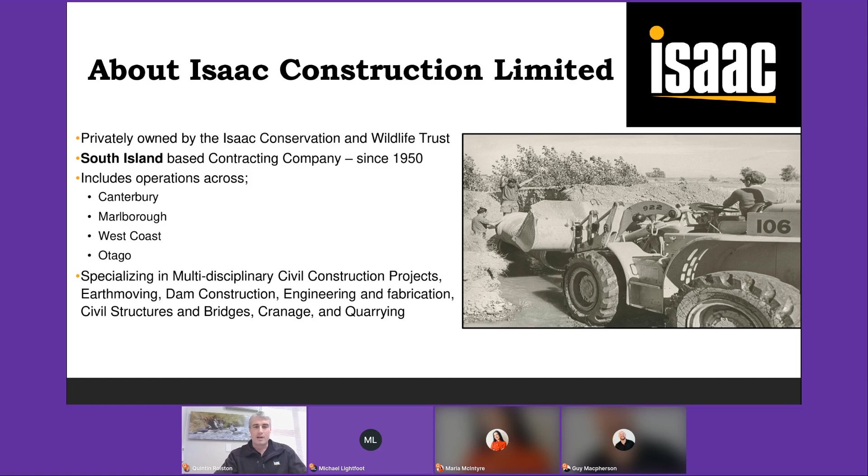We've got three key brands. Simcox is our Marlborough brand, Isaac Construction is our Canterbury and Southern brand, and Liddell Contracting is our West Coast team. And you'll see this pop up a little bit as the Isaac Conservation and Wildlife Trust is our ultimate owner, and I'll talk about that at the end of my presentation a bit more.

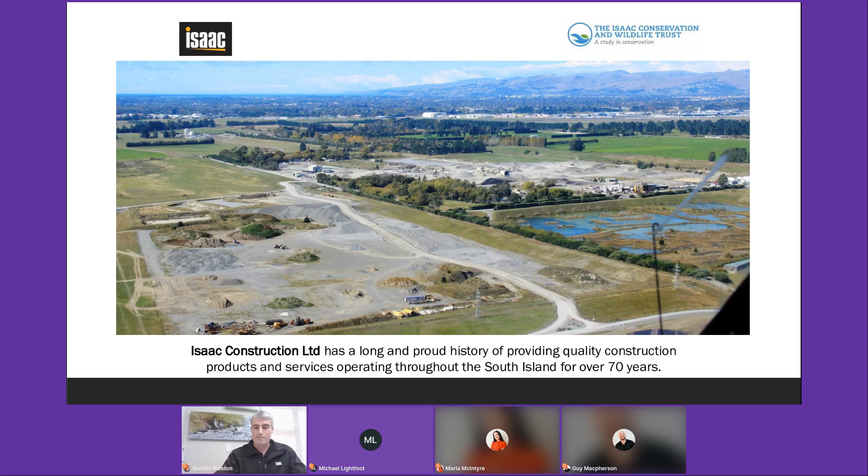So we're based in Christchurch. This is a view across our property where our key quarry is at the moment, looking back across Christchurch and over to the Port Hills. So we're situated between the Waimakariri River and the airport.

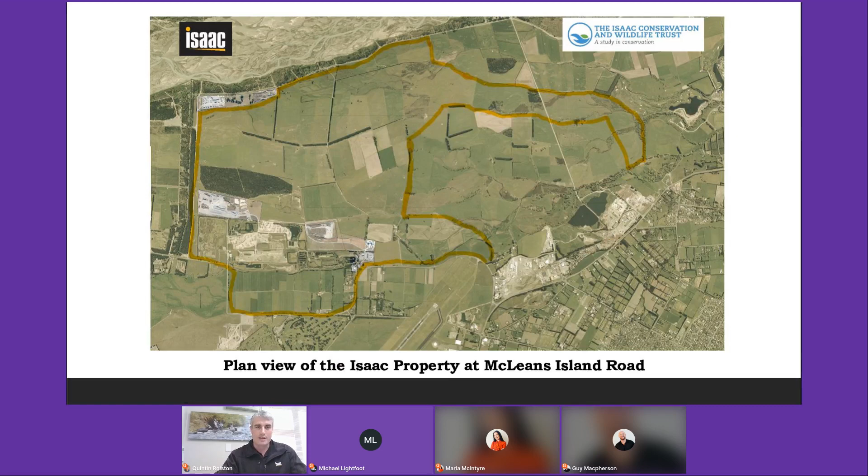Bit of a snapshot of our land there. We've situated 1,100 hectares, like I say, between the Waimakariri River and the Christchurch airport.

So here's just a bit of a summary of some of our core areas of business: construction, engineering, paving and sealing, so surfacing works for roading. We've got traffic management, laboratories, transport divisions, departments, and we operate across Marlborough and the West Coast, as I mentioned, with Simcox and Liddell Contracting, and Isaac Southern and Isaac Southern Quarries is our Dunedin branches, and that's where our project features that I'll talk about soon.

Pictures are always helpful to actually visualise what it is that we do and why we might be interested in noise and vibration monitoring. So this is pretty typical of the type of things that we are out there constructing and building: streetscaping works, asphalt paving, paver laying, and general construction, and particularly central city type construction works.

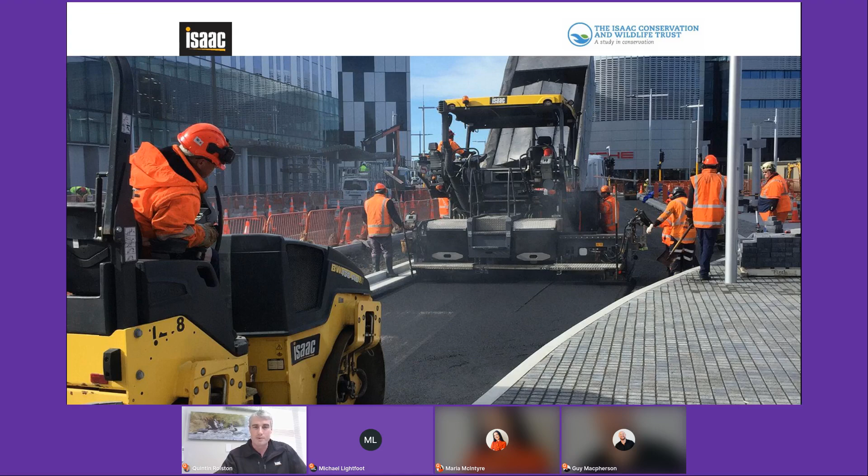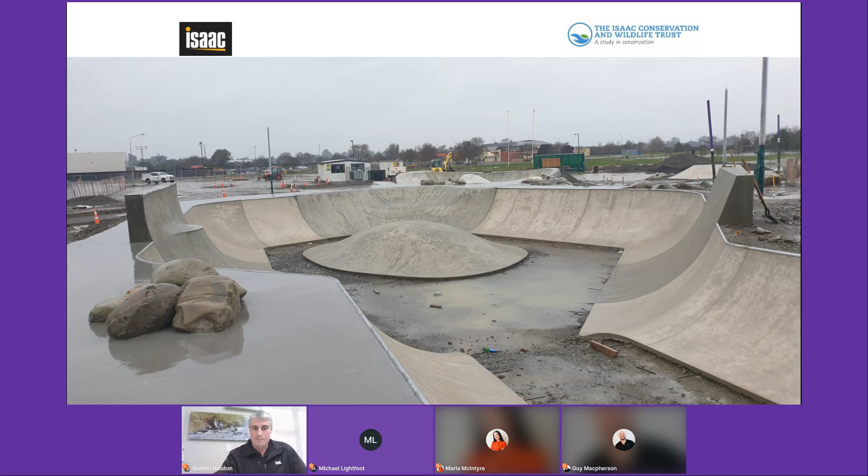Just run through a few examples. I guess Kilmore Street in Christchurch there, outside the town hall. We're into a variety of things, currently building a skate park in Selwyn.

Quarrying operations, so crushing and turning big stones into small stones, which is pretty interesting, but certainly has a noise, vibration, and dust effect on surrounding community.

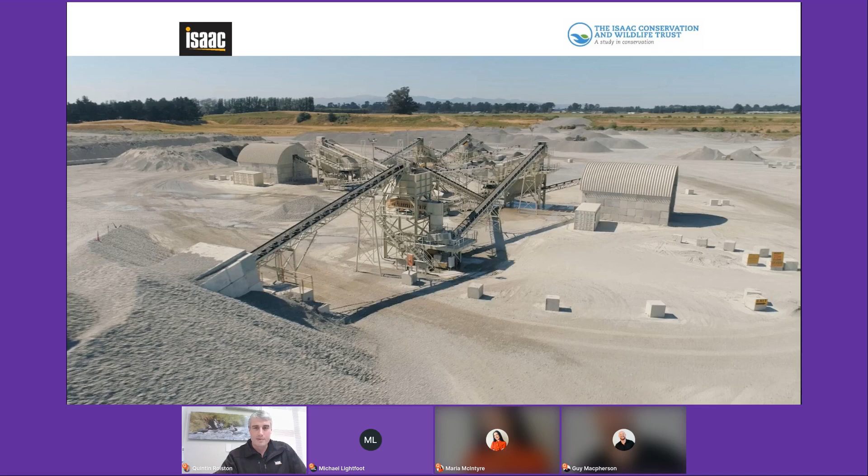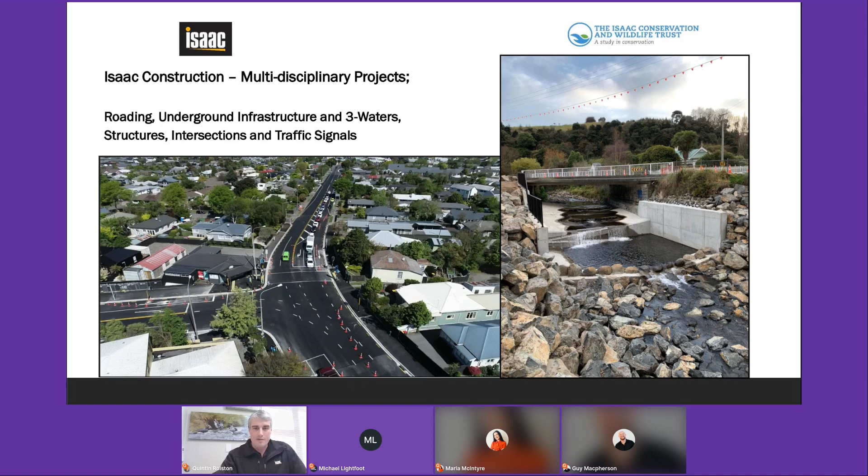And just a few more project examples of what we've been building. Christchurch Northern Corridor access into Christchurch on the left there, and a river upgrade project in Dunedin on the right. A bridge construction project on the west coast, which is just coming to completion now.

So I'll move on to our particular project that we're looking at today, which is the Retail Quarter project, George Street upgrade in Dunedin.

The Filluel and Great King Street areas are 3 water upgrades with more traditional streetscape topography replaced on top, so curb and channel, asphalt footpaths and generally asphalt pavements. The central spine through George Street and on some of the side streets there is more of an urban city mall environment. I'll show some photos of what we've currently got and what we're looking to achieve soon.

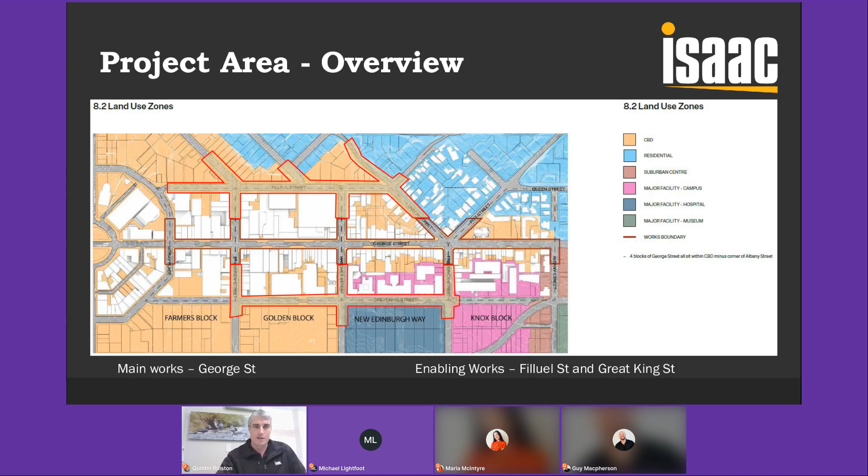We've got some stormwater upgrade works, some pretty substantial stormwater upgrade works of some pretty big diameter pipes, upwards of 1650 in diameter, which just requires large excavations, large deep excavations, potentially sheet piling and shoring and other interventions. Full 3 waters, full potable water upgrade.

And this is right across the cross section of the street from the shop frontages right out through the centre of the road across to the other side. So it's pretty invasive sort of work that we're undertaking.

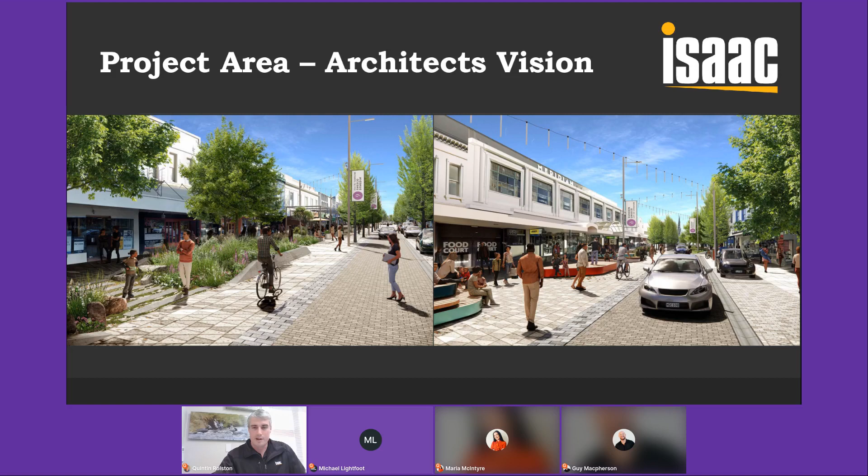So just a bit of a summary of it there. All 3 waters, deep excavations and trenches. We've been using trench shields to date, but there's a potential we'll need to use sheet piling in the future.

The roading works are pretty substantial, full reconstructions. So a lot of excavations and dig out and full replacement. Therefore a lot of compaction and a lot of vibration and noise. A lot of streetscape works, paving, new lights and street furniture and decorative footpaths, paved footpaths.

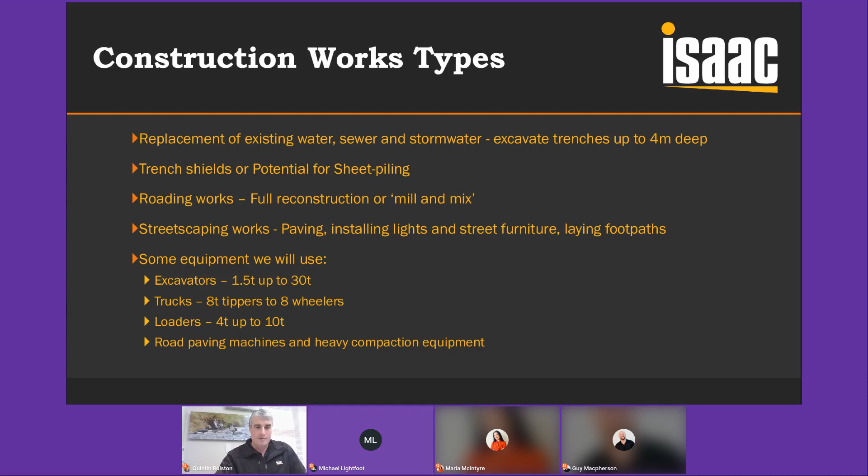And a bit of a summary of the cross-section of machinery that we'll be using. So large excavators, hopefully not cranes, but there's potential for cranes, certainly trucking, loaders, heavy compaction equipment.

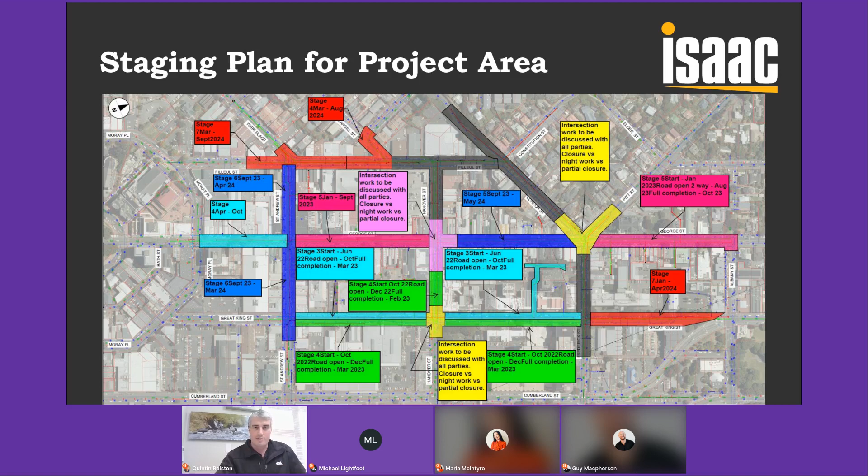So there's quite a few key challenges with undertaking this work. A few of the key ones I'll run through here is managing interface with stakeholders and shops. This work does go through the key retail offering of Dunedin. There's the only three malls in Dunedin that are within our project area.

There's a lot of inner city retail and food and beverage offerings, small businesses and small retail shops, as well as big brand shops. So our project is hugely affecting these people, and it's a key thing that we need to try and manage whilst doing some pretty invasive work.

So managing the traffic flows, managing access, business disruption, and at the same time trying to complete the works as efficiently as possible and keep on program as much as possible, which is a real challenge.

Of course, we have to manage safety, which is paramount, of our people and the general public. We want to complete the works to a high standard. And then the two key ones is managing expectations with regard to noise and managing vibrations.

Additional to the retail offering through this area, there's also flats and apartments up on the second and third stories of many of these inner city retail shops. So that's just an added challenge to it.

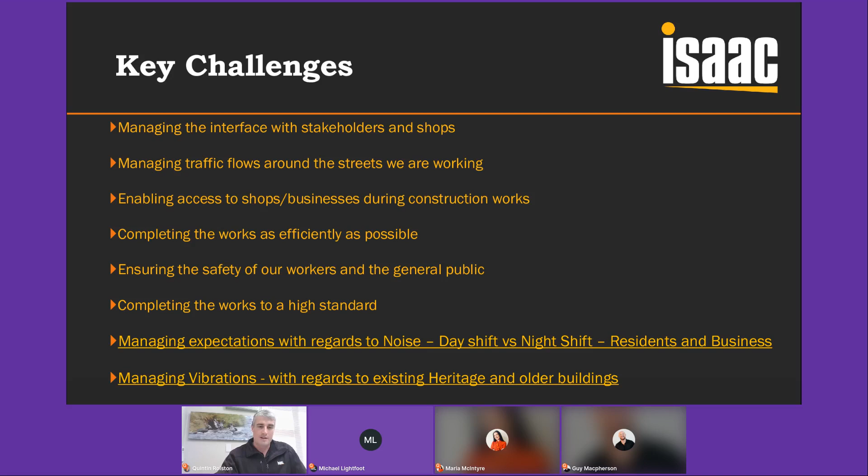We'll talk about these two mostly today.

So, managing expectations with regard to noise. Like I say, we've got businesses trying to operate during the day and residents trying to sleep at night. So the noise limit that we have on any of these sites is 85 decibels, and that's what we're tracking against.

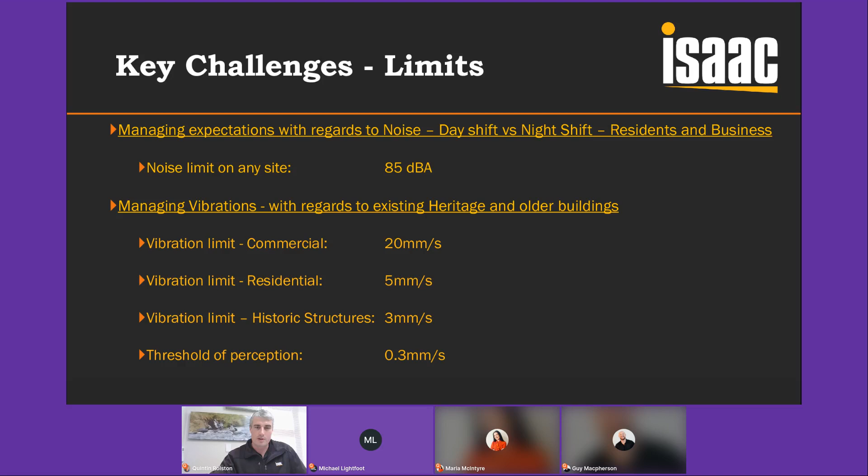And then in terms of managing vibrations, there's a number of standards and parameters that we can look at. These are the ones that we've looked at as part of our project. The key ones we'll focus on are these two: 85 decibels for noise and 3 millimeters per second peak particle velocity for measuring our vibrations.

And that's a guideline that's set down for ensuring that we don't damage historic structures, which we do have a number of heritage items within this project, including a number of heritage buildings or heritage-featured buildings. So that's the limit that we've set for ourselves, and that's what we're tracking against at this stage.

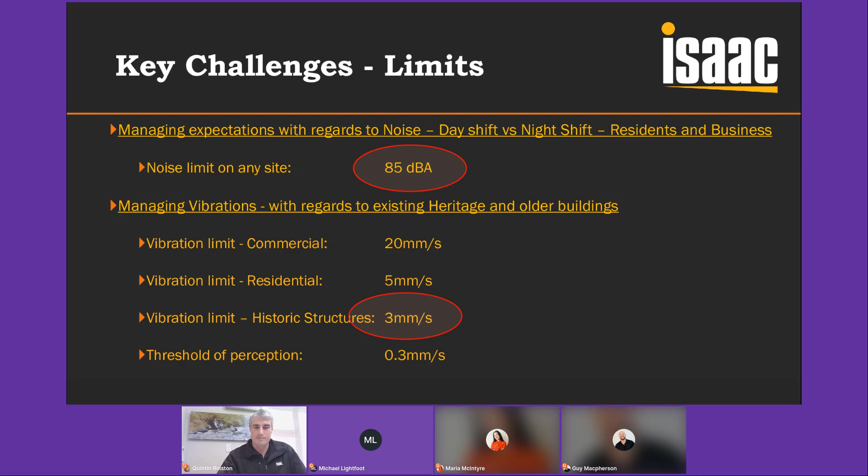This is a panoramic of one of the legs of the work, one of the sites, which is Hanover Street. We've been working in this street since about April this year, and here's a bit of a snapshot. It's a little bit hard to tell, but the excavations and the trench shields that we have in there go down to about 4.4 meters deep, I think it was, through here. So some pretty deep and pretty invasive excavations, and you can see we've got some big machinery, a 14-ton machine, and trucks coming in and out of that site, as well as other smaller machines, smaller loaders, etc.

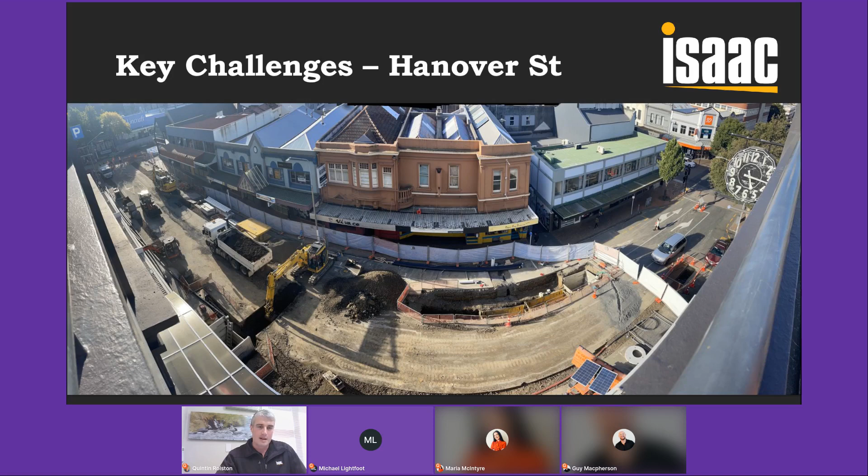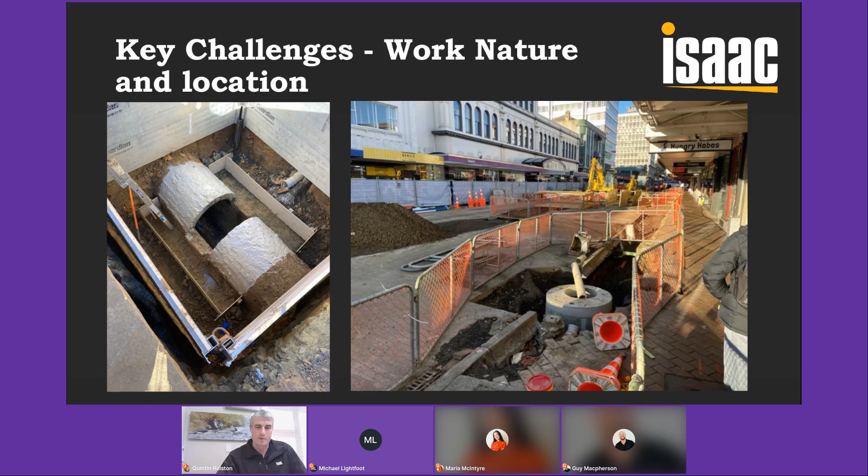And there's a snapshot of George Street, sort of showing how close our work site is to the shop fronts. In fact, we'll be going right up to the shop fronts and the boundary line with our new paving when we get to that stage. But it's pretty invasive.

So that's a bit of a snapshot, but we can also get specific details for individual monitors.

So again, this is a snapshot of the current noise level from when it was taken at 283 Great King Street. It was currently running at 50 decibels, but the graph on the right there gives us the snapshot of the day. We can see from midnight it's hovering between 47 and 50 decibels. Then as we started work shortly after 6 a.m., 6:30 a.m., the noise level rose quite rapidly up to about 80, then leveled out a little bit, floating around 60 to 70 decibels. And that's reasonably typical for what we're seeing on many of our sites at our monitoring locations.

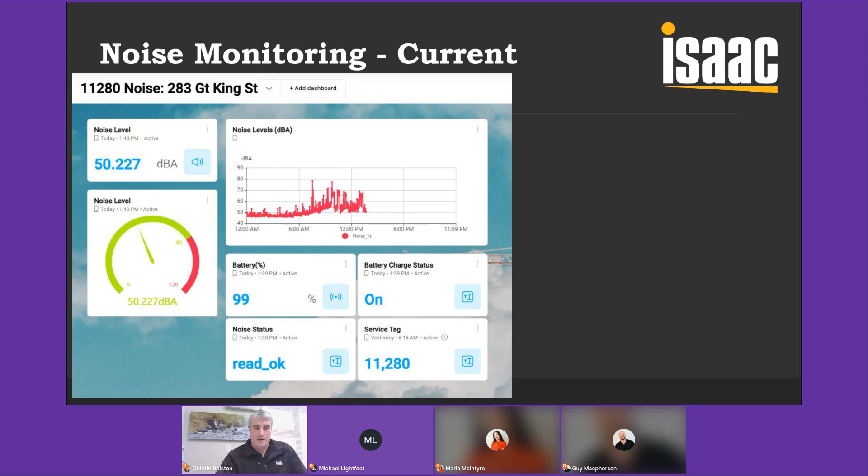So that's another snapshot, and further to that, we can run reports for the last week, the last month, or any time period that we choose just by using the filters in the Adroit software. So this is just a snapshot from that same site, 283 Great King Street, looking at the noise levels over the past week. That one shows nothing over 70 decibels for that particular time frame, which is generally fine.

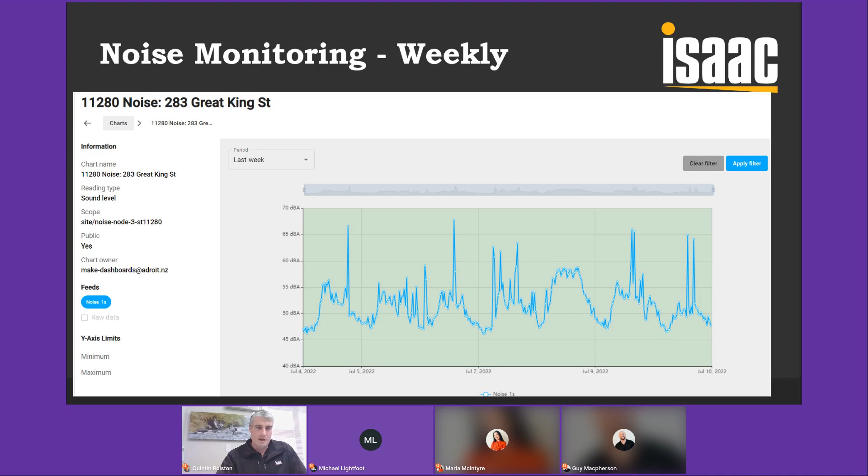I've added in another one here, another one of our noise monitors at Farmers Block, which is on George Street itself. Just showing there that these noise readings are getting quite close to our limit, and in fact some of them have eclipsed it on a couple of occasions. So I guess this is the data that we can use to discuss with our client and stakeholders, and look at our work methodologies and noise screening opportunities. Because at the end of the day, we've got to do our work, but we've also got to manage noise and manage the expectations of the stakeholders and residents.

This is the kind of report that we can get out of the software.

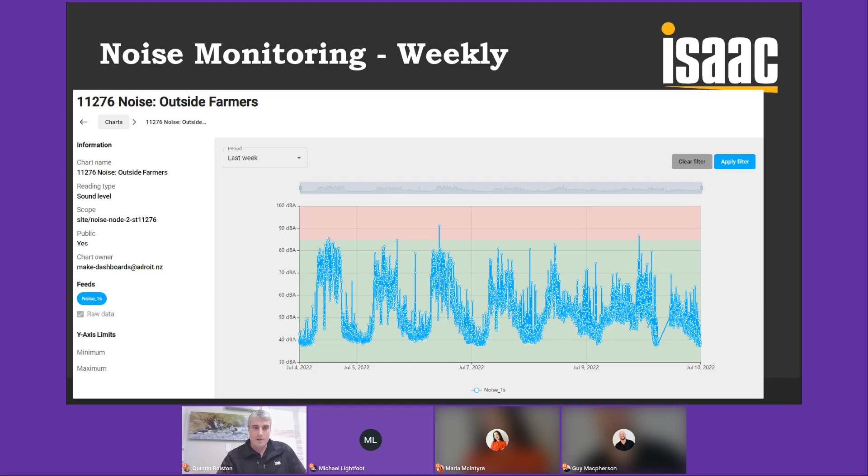Focusing on just one of them, 26 Hanover Street. If you remember, we set ourselves a limit of 3 millimeters per second for peak particle velocity in all directions, X, Y, and Z, which I've circled there. The top left graph, a bit small and hard to see, shows the actual peak particle velocity reading. It's well below 3 millimeters per second on this particular day, hovering more like 0.1, which is pretty low. What we generally look at is the percentage reading towards that peak particle velocity. I'll go into that in the next one.

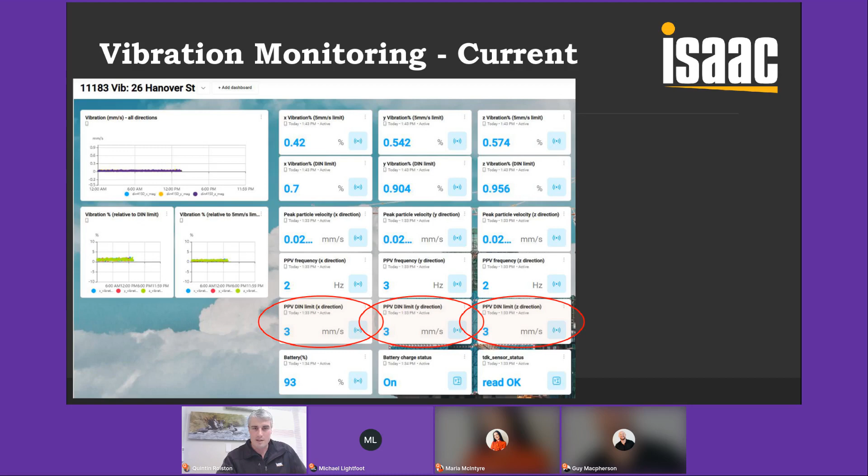Going back to that photo from before, this monitoring site is at the site where we were doing deep excavations. So it gives a little context on the type of work we were doing and what these results refer to.

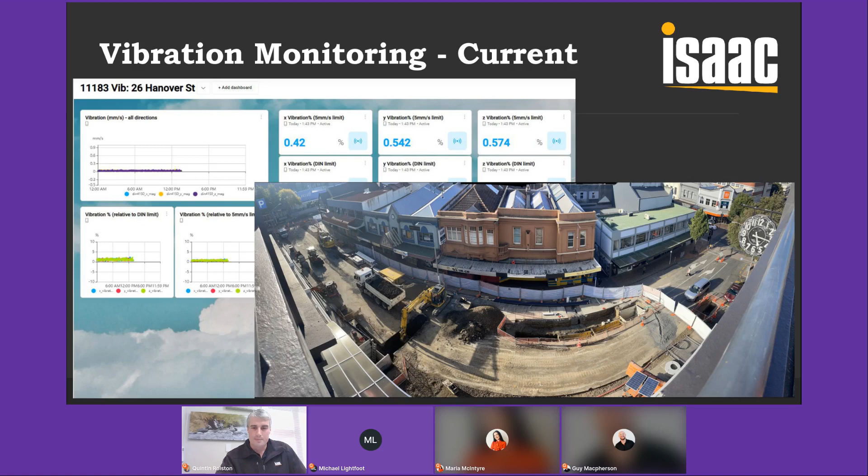I went back in time and pulled the information from when we started down there on Hanover Street, around the 20th or 21st of April, when we got the monitors set up. That first portion of the graph, for 4 or 5 days, was zero construction activity on site, and you can see it still reads some movement. Then around the 23rd or 24th of April, you can see the lines start to move a little bit, which coincides with when we started work on that site.

I mentioned we're measuring percentage of peak particle velocity, so we're at less than 5% of our 5 millimeters per second limit, well below our limits, which is good. That graph is a little hard to see, so I've blown it up a bit there, same graph as below but easier to see. There is a bit of a difference when we started work on site.

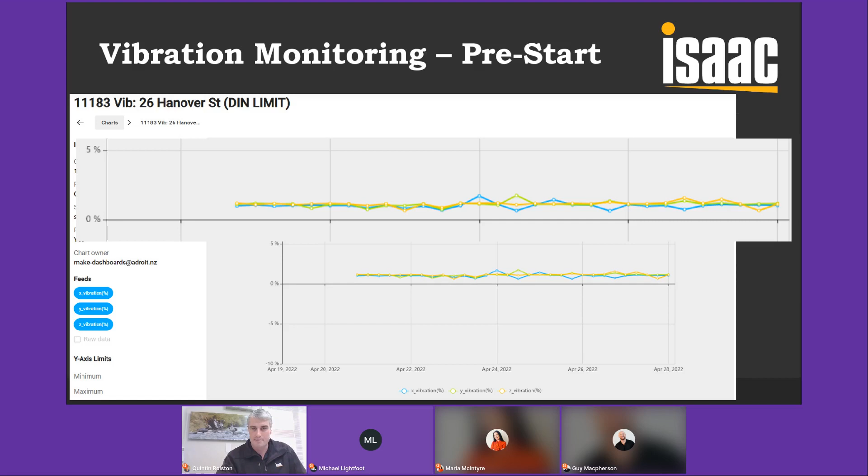Same as the noise monitoring, we can pluck out a time period. This is looking at a month from when we started on Hanover Street through to the 20th of May. You can see right at the start very small movements, and then some movement over time across that month, but well below our limits for vibration. This is good data to have, particularly if we get complaints from business or building owners about cracks or damage occurring to their building, so it's good to relay and address their fears that might be due to our works.

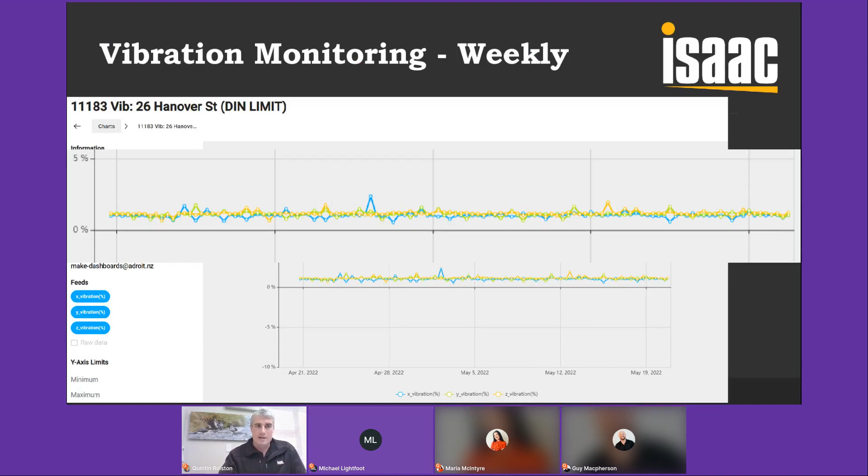That's the end of the vibration and noise overview for what we're doing here on site. To wrap up my section, I'll quickly go through and refer back to our Isaac Conservation Wildlife Trust, who we are and what we're about.

Founded in 1950 by Sir Neil and Lady Diana Isaac, who were contractors but also conservationists at heart, they set up the Isaac Conservation Wildlife Trust, which operates in perpetuity and is the reason the construction business exists. We exist to ensure these people can keep doing their good work. They are a self-funding charitable trust established for conservation purposes, based out of Canterbury but with operations across all 4 regions we're working in.

They have 3 key mandates: first, conservation of native fauna and flora; second, conservation of heritage buildings; and third, conservation education. We've got the Isaac Conservation Park, where we breed endangered birds, 5 species at the moment, and in partnership with DOC we release them into the wild. The team has done some amazing work over the last 25 to 30 years in that space.

We also rehabilitate our quarries into wetlands, reserve areas, and breeding facilities for that work to occur. We've created the Isaac Heritage Park, which again is on site out at McLean's Island Road, Canterbury. And the education side is postgraduate scholarships at Lincoln, Otago, and Canterbury universities.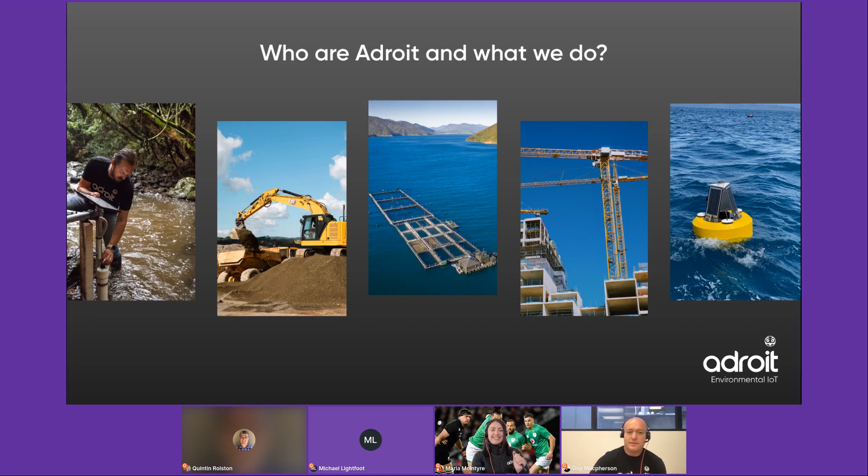Awesome, thanks Maria. Okay, so we work with a variety of different types of sites. So why do we monitor on work sites?

We work with industrial sites, greenfield sites, and across civil sites, and they all have different requirements. With greenfield type sites, you're looking at monitoring on the borders, around your sensitive areas on that border, as opposed to a working site like a hospital, where you're monitoring within the actual site.

The three areas that we monitor around this are compliance, complaint mitigation, and health and safety. Compliance is understanding the resource consents and thresholds for that particular site, and it gives real-time data through to the site managers so they can manage that site efficiently.

The second one is complaint mitigation. This is about being able to bring up your historic data so you can actually see when there's a complaint, if the site is in breach. Potentially it may not be, so you're able to show the data and say, hey, it was maybe noisy, but we are well below the 85 dB threshold.

The third one is health and safety. This is where we monitor foundries, we work with crushing plants. It's about understanding what's happening within the hazards on a site, understanding your PPE, when you should be wearing it on site, and just giving you greater visibility.

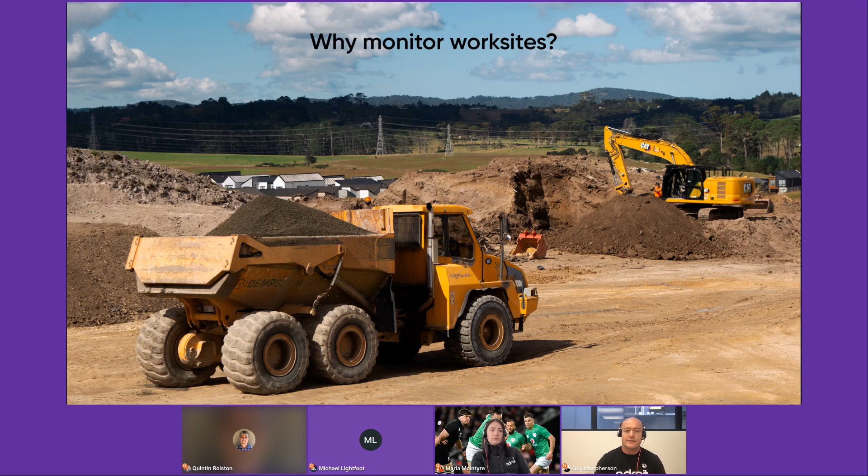I'll set you back to Guy. Awesome, okay. So what do these look like in real world situations? I'm going to go through 4 different setups on 4 different sites. The one on the left is one we did with Firth.

This is monitoring noise and dust with solar. As you can see here, it's on a fabricated steel pole, so this is made to be fixed, not moved around the plant.

The second one is something we did with Dempsey Wood for a civil site. Civil sites are often really big sites with the work slowly working down them. As you'll see on this monitoring station, which is also doing noise and dust on solar, it's got a base with sandbags in it. This means the monitoring station can actually be picked up and moved down site.

The third one is something we did with Precinct Properties. This is using existing structures adjacent to the site, and this is just monitoring noise. So this is with your inner city type environments, when you can install onto structures or existing fixtures.

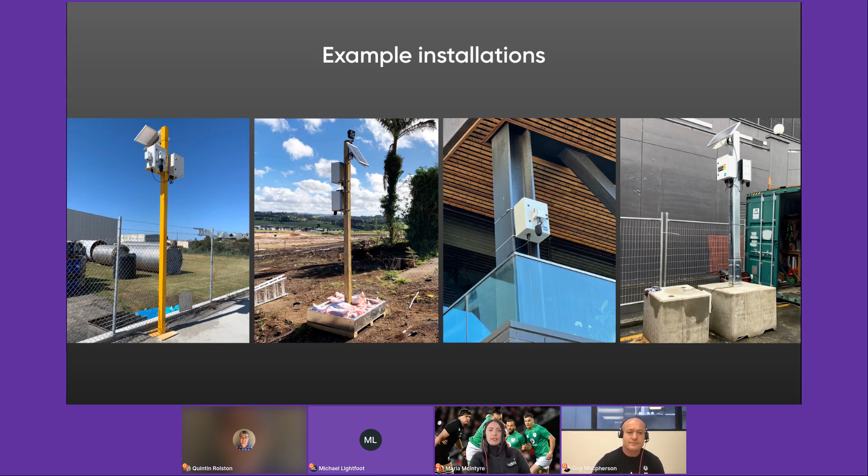Sweet. So now we have them installed, how are you going to access the data?

The platform can be accessed in two ways: you can download it on your iOS or Android app, and you can also view it on your browser. This is what you're looking at here, on your browser. We wanted to get the most engagement possible from our platform. On the left you'll see one of our old type platforms, where you're just looking at boxes with the data.

And on the right, you see we've overlaid a site plan. So a site manager can look at that and say, okay, here's all the sensors, and they can quickly figure out what's happening. They're all in green, which means they're not in breach, so they're within the set threshold.

Our platform, again, we sourced the best of breed platform — we didn't build it ourselves. It comes with all the functionalities you need: full visualizations, thresholds, alerts. There's a full set of APIs, so you can plug the data straight into your SCADA or your project delivery apps that a lot of our clients use, and then it can all be downloaded onto a CSV file or your Excel sheet.

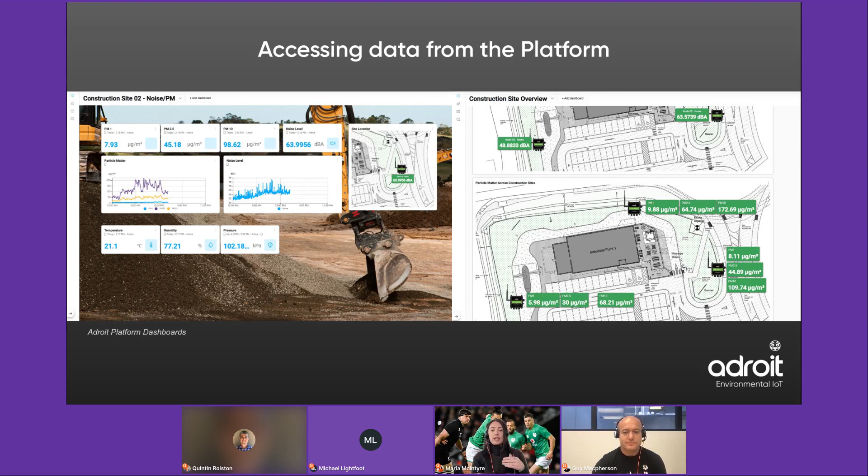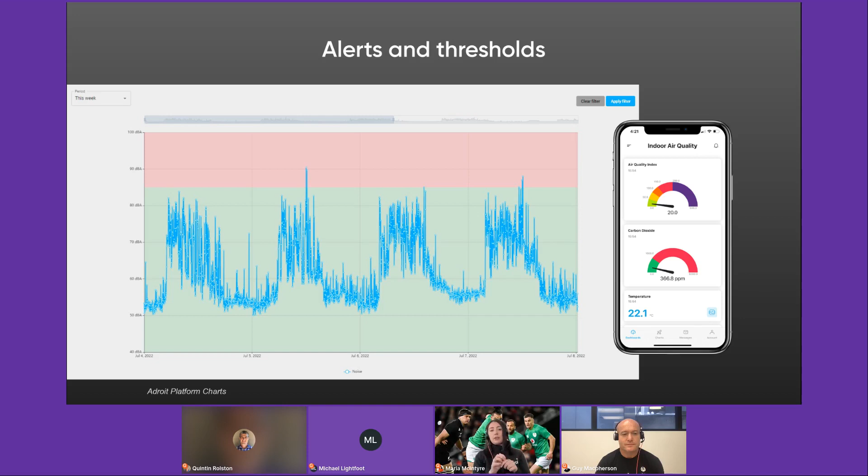If we go to the next slide, it will show us the charts. This is where you're going to get your deeper insight. We've set a threshold here of 85 dB, which means they've literally only gone above that maybe twice or three times. Super compliant site. It's a great tool when you want to communicate that with your stakeholders, your staff, your board, or anyone coming on site. You can say, look, we're doing everything we can. We're not in breach, or we are, and we're doing everything we can to deal with it. So yeah, it's an awesome visualization tool.

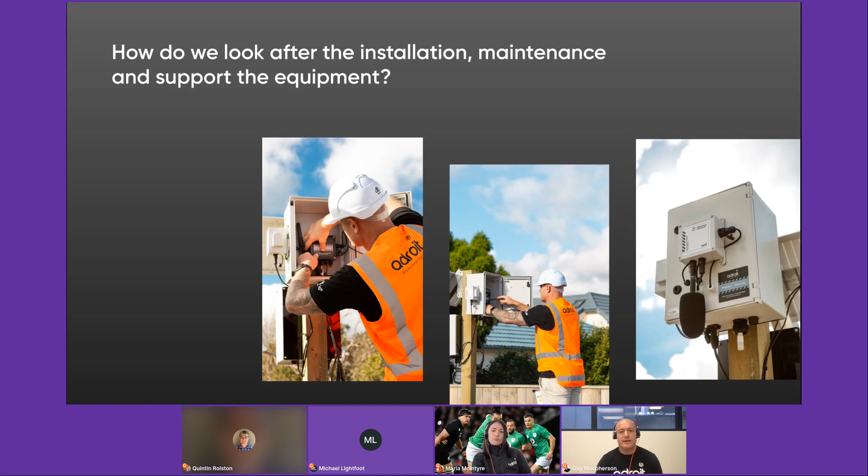Fantastic. Okay, so what about the installation, the maintenance, and support of the equipment? We have a nationwide team that manages all of this for you. One of our project managers will talk through with you, understand what the consents are, the actual type of site, and look at where's going to be the best place to position a monitoring station. We then look at what's the best way to install, whether it's on a post, on a wall, or whether we should organize the deadman's block. We then look after the maintenance. To be honest, all of these types of solutions are very low touch, so there isn't a lot of maintenance required. And with any support, we've got phone support as well as our team that can come on site to do any break fixes.

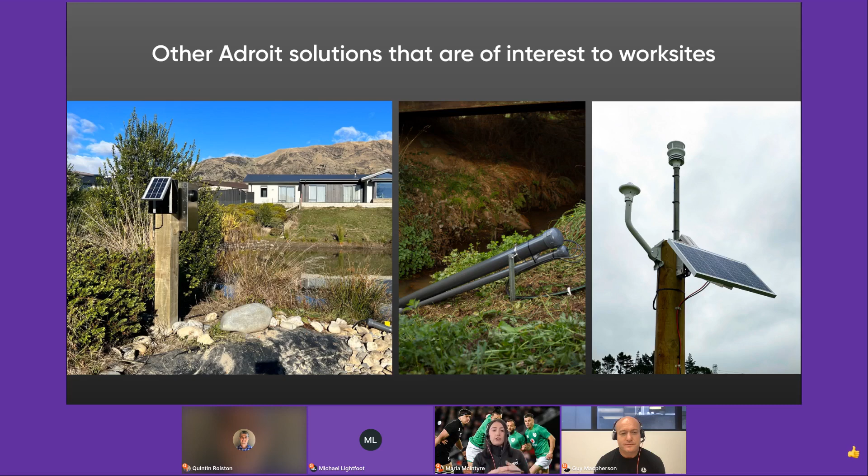Maria. Sweet, awesome. So as well as our dust, noise, or vibration, we also have a full range of gases and other solutions. We've got a full suite of weather stations, so we're installing a lot of wind speed and direction on civil construction sites to track and trace the dust. We also install onto cranes for those extreme weather events when you want to claim back on a day's work. We also have our water quality solutions, installing a lot of turbidity and pH monitoring for your discharge runoff, around your sediment and your pH around the concrete. So yeah, if you have any questions on the other solutions, please fire them through.

Cool. And I guess the last thing to mention is that we have a partnership with Spark. It's a reseller agreement, so when you do a solution through us, it's charged on your Spark account. We've got finance options available, interest-free options, subscription model. The thing to note, however, through this whole process, it's Adroit staff that will manage you through it, and we will provide the ongoing support for all of our solutions.

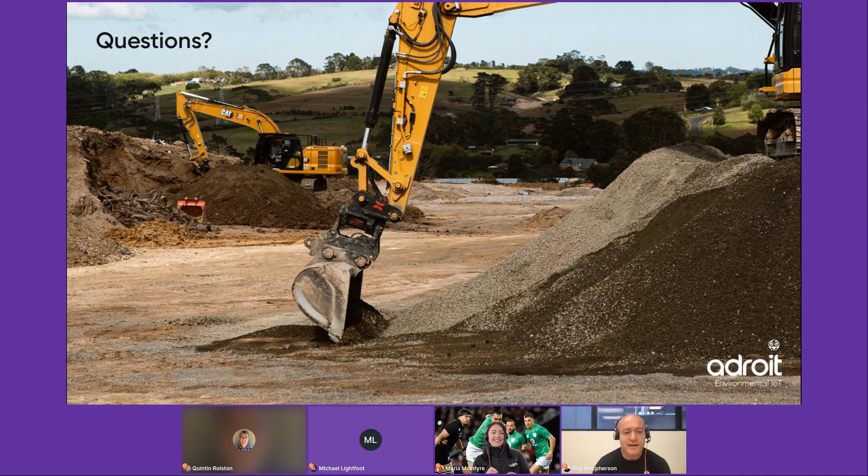Hey, thanks very much, guys. That's really interesting information to share with the people on the group. It's good to see the technology that's actually been used down in Dunedin, and also what else it can be used for. So it's really now time we'll go through the poll results and also a bit of Q&A.

So if we head over to the poll results, looking at what do we need to monitor on your work site? I guess the winner, if you call it that, is noise, and then dust, followed by vibration. Really keen to hear from the Adroit team and also from Quintin, what do you think about those results? 2% said don't need to monitor. Got a bit of work to do, eh? Absolutely.

I think noise is probably one of the most popular ones that we monitor, actually. Noise on a construction site is certainly pretty controversial at times. Vibrations for us are probably more around damage to buildings. That's where we're really keen on it for Dunedin, because we have a number of heritage structures, or heritage feature structures, which aren't actually heritage but have heritage features involved in them, and we certainly don't want to be damaging or cracking those.

Yeah, and we find dust is really important on civil sites, more when you've got those bigger sites or across quarries, and probably more around the compliance side as well, making sure that they're not getting across those thresholds. Absolutely. Well, thanks very much, team.